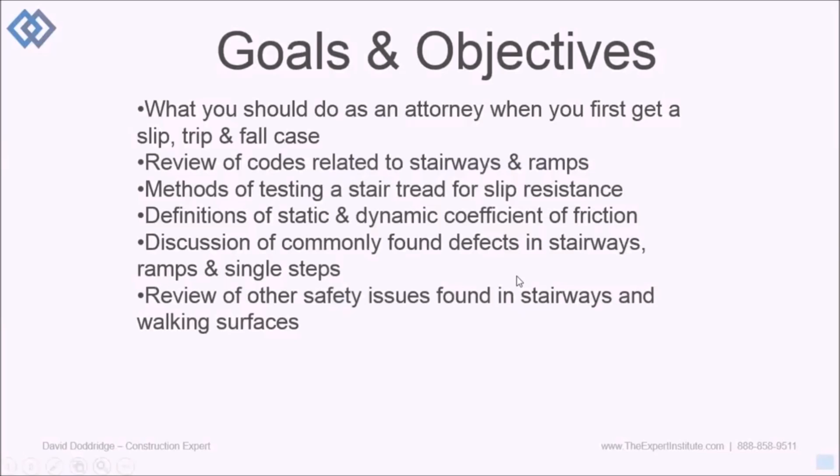So, what should you do as an attorney when you first get a slip, trip, or fall case? Again, this comes from the advice of my attorney clients.

Go to the scene, take pictures from all angles - the more the merrier, really. You want to try to memorialize the scene as accurately as you can and as soon as you can before it changes.

Sit and observe the scene yourself, maybe not 20 minutes, but just stand and watch. If it's a busy location, you'll see people, how they use it.

Maybe make a note of the weather conditions, of course, if it's an outside stairway or if it's an inside stairway in close proximity to an outside door. Maybe some contaminants, water, whatever, had migrated into the stairway area.

Obviously, ask the client if there were any witnesses. Get an immediate statement. Interview employees.

If it's in a retail location, maybe they might give you some clues as to other accidents that have occurred, and why. Check the status of the owner.

Find out who the owner or the lessee is. Find out if the owner is a corporation and who the shareholders are. Find out if the lease is recorded. Find out if the lessee is responsible for...

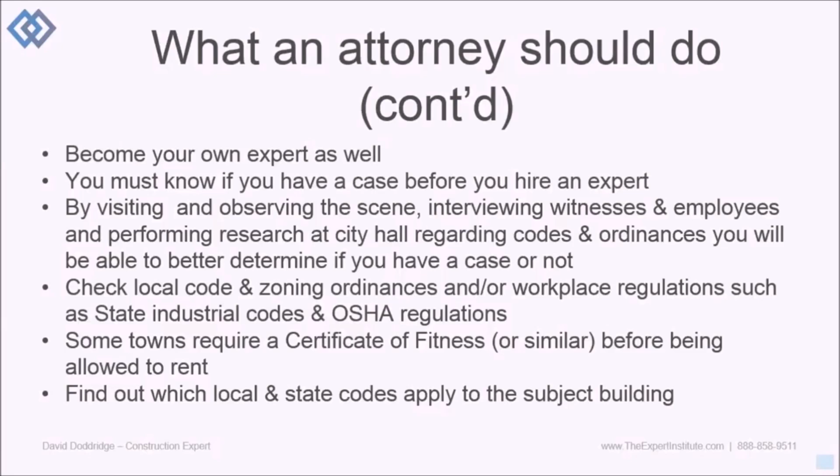...code violation. Some towns require a certificate of fitness before being allowed to rent. So there are local codes that come into play as well.

If it's a workplace accident, ask for a copy of the written safety plan, like on a construction site. The contractor and subcontractors should have safety plans, and find out if there were any safety meetings held. Again, state industrial codes and federal OSHA regulations may all apply.

Key market segments most affected by slips, trips, and falls: healthcare, the aging population, of course, food service, in the back in the kitchen. I've worked in kitchens before, and those floors can certainly get slippery, and it can be a real madhouse. Hospitality industry, lots of people coming in and out. Retail, mercantile, office, transportation, industrial, gaming, and casinos are always packed with people. Escalators, stairways, constantly being used.

So what are the causes and contributing factors of stairway accidents? Physiological factors, including balance, aging population. Again, a lot of older people fall. Hearing, vision. We'll get into the lack of a visual cue. In other words, sometimes, and we'll get into a lot of photographs in this presentation as well, which to me are probably the most valuable part of this presentation. Lack of a visual cue indicating that there is a step or a change in elevation, or at the top of a stairway. It's sometimes difficult to tell that a stairway even exists.

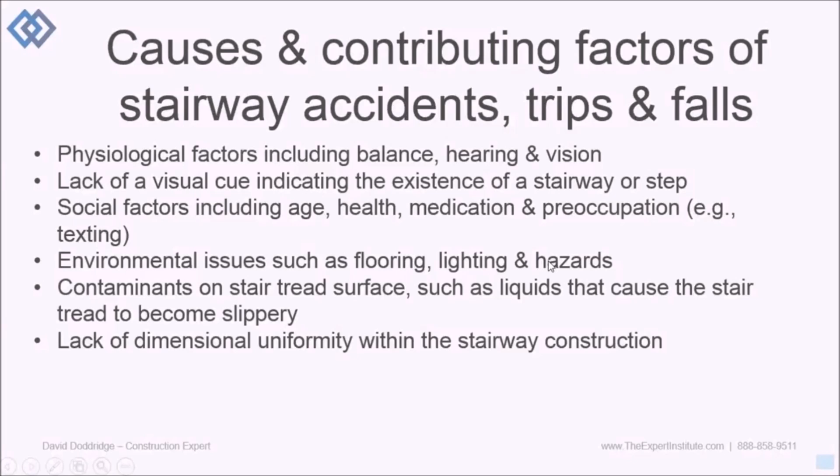Environmental issues such as flooring, lighting, hazards, things that are in the way, a handrail that's sticking out, all sorts of different things that could affect the safety of the stairway. Contaminants on the stair tread surface, such as somebody might have spilled some coffee or some water, or snow or ice or rainwater migrated in just by foot traffic. Lack of dimensional uniformity, and this is kind of a big one with me, and we're going to get into that in some of the pictorials that I will show.

So let's move on. Stairway basics, definitions of various components of a stairway. The tread is also known as the step, the surface that is actually stepped upon. The rise is the vertical distance from one tread to the next. The nosing is, if you look at a stairway perhaps in your home, the tread will stick out slightly beyond the riser, supplying what's called a toe space. Dimensional uniformity. Codes require that there are maximum variations in tread depth and riser height from one to the next in order to maintain dimensional uniformity for human factors purposes. And again, I've got sketches that we'll go into.

Structural integrity. Obviously, a stairway has to be strong enough to support itself and the load that's imposed upon it. The stringers are the angled pieces on the left and right that oftentimes the stair treads are fastened to, so they are typically a structural component. Handrails, obviously the handrails that you grasp as you're ascending or descending the stairs. And I've got sketches of this in here as well. They're to be no greater than 2 inches in width for gripping purposes. A single handrail is typically required in 1- and 2-family structures. However, a handrail is required on both sides of the stairway for commercial buildings.

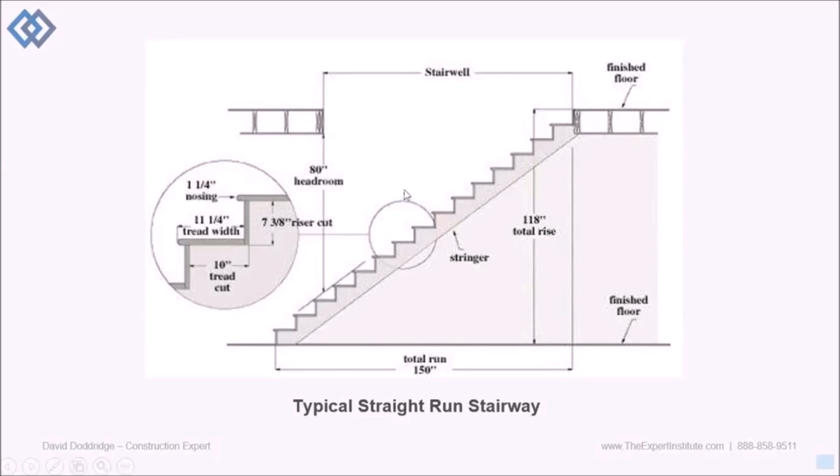This is the tread width. 11¼ is a typical dimension. Headroom, this is 80 inches, and that is measured vertically from the leading edge of the treads. That is a typical headroom for a stairway, particularly in a 1- and 2-family residence. In commercial, sometimes the code requires more. So we get into a spiral stairway. We've all seen these. I'm not a big fan of them. In my opinion, they're pretty dangerous, but they do exist. There are codes with regards to the dimensions of spiral stairways as well.

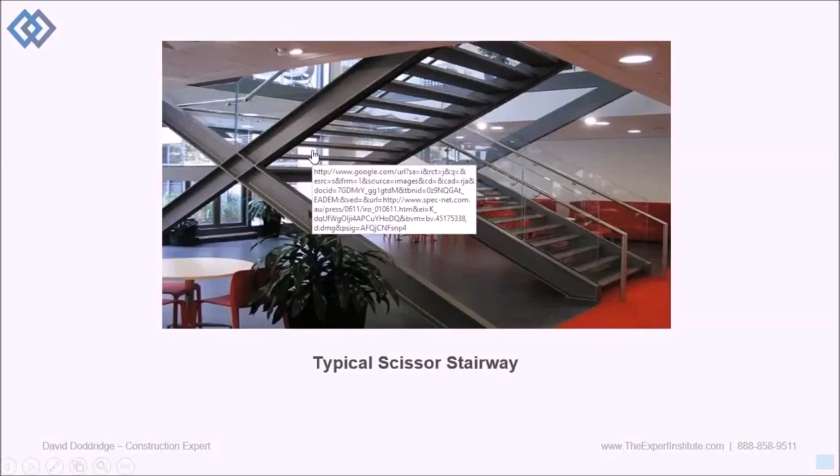This is a typical scissor stair. You can tell by looking at it why it's called a scissor stair. So here we have a good example, the handrail that comes up at a certain height, usually 34 or 32 to 38 inches, I believe, measured vertically off the leading edge of the treads. And then you come up and you get to a landing. So this over in here is going to be referred to as a guardrail. Okay, the guardrail has to meet certain guardrail requirements.

I'm not a big fan of these either. These are pretty dangerous. This is known as an alternating tread stairway, and it's a space saver. Obviously not used really in residential, but more in industrial applications. And there are some specific codes with respect to the amount of floor space that a stairway like this is allowed to serve. Naturally, this is a stairway that is not going to accommodate high foot traffic.

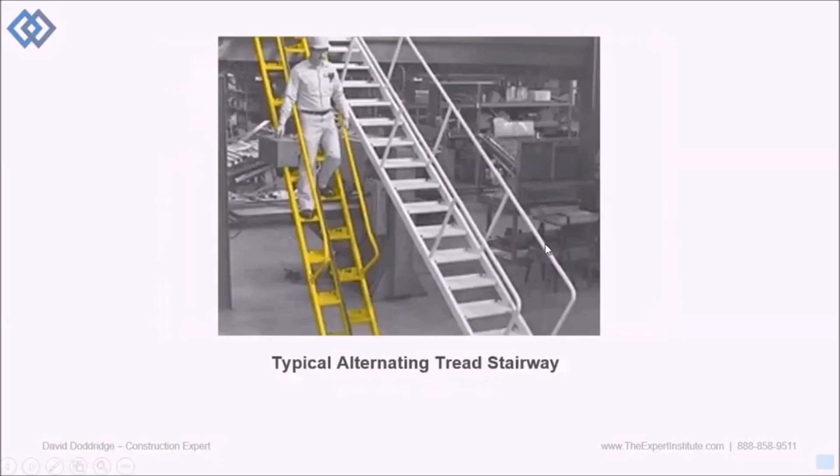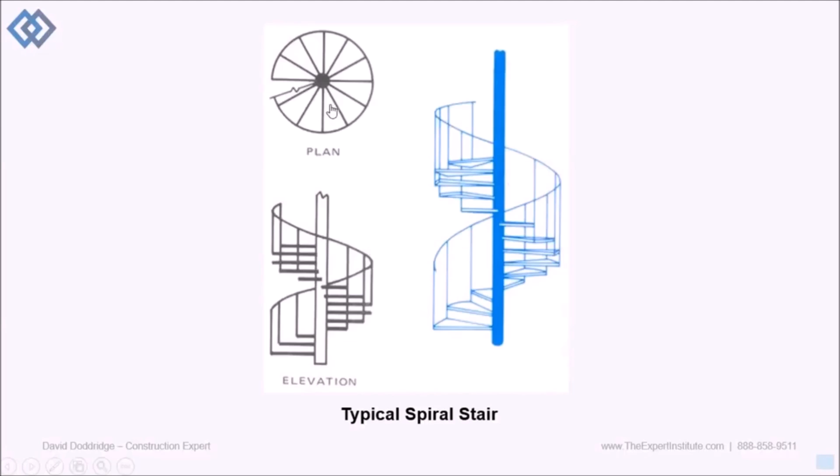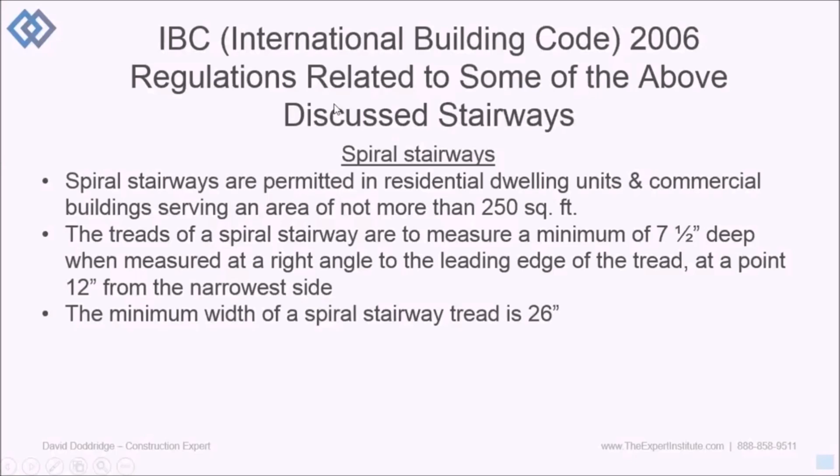So let's jump back to a spiral stairway right here. When you measure out along this radius 12 inches, the depth of the tread in this direction at a right angle to that 12-inch measurement cannot fall below, I believe, 7.5 inches. So in other words, the tread of a spiral stairway, when measured from that narrow point 12 inches out, cannot be less than 7.5 inches deep at that point. The overall minimum width of a spiral stairway tread is 26 inches. So the treads themselves cannot be less than that.

Building code continued. This first one is an OSHA regulation. OSHA Part 1926, which regulates the construction industry, does not allow, as I mentioned earlier, the use of pan stairways by workers until the pans are filled with concrete or a temporary wood filler piece. One of the reasons why I included this in this presentation is because I do a lot of construction accident work, and this happens all the time. A worker will be walking down or up a metal pan stairway that's not filled in, and their foot will catch on an edge, and they'll trip and they'll fall.

Alternating tread stairways, much like spiral stairways, are only allowed to serve a fairly small area, and they're limited to their use in factory, high hazard, and storage buildings. Again, not more than 250 square feet. So, say, a storage area or something like that. Alternating tread stairways are also allowed for use in institutional buildings, such as prisons, serving a guard tower, observation room, or control room not more than 250 square feet.

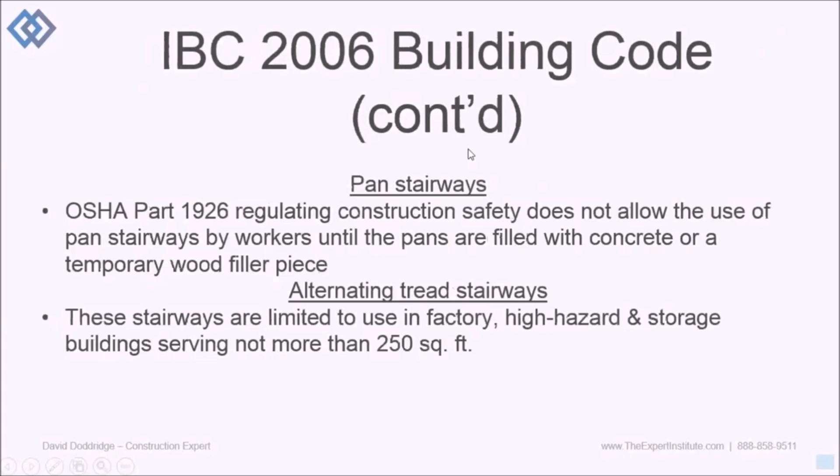So these code regulations are pretty specific with regards to dimensions, and this is not something that is necessarily going to be all that obvious by looking at it. It's not going to be obvious until you actually measure and analyze the stairway.

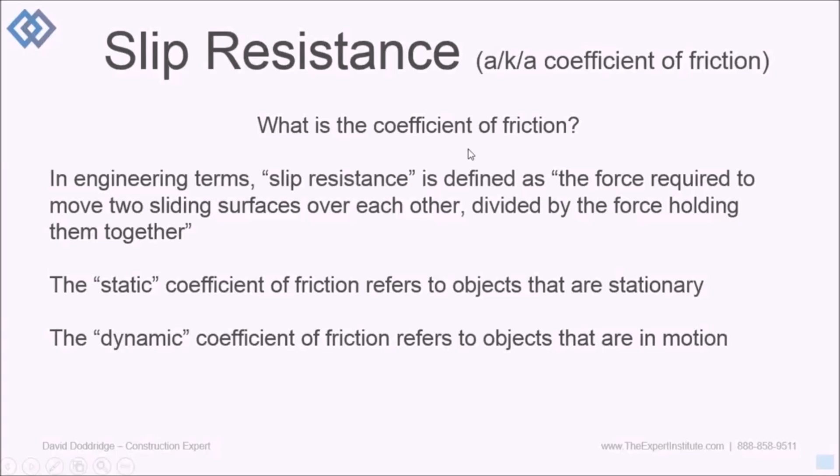Okay, so let's get into the slip resistance of a stair tread, which is also known as the coefficient of friction. So what is the coefficient of friction? In engineering terms, it's defined as the force required to move two sliding surfaces over each other divided by the force holding them together. And I'll simplify that in a minute. Static coefficient of friction means that the object is stationary. Dynamic coefficient of friction refers to objects that are in motion.

So to put it in simpler terms, for the purposes of this presentation, a coefficient is a number that is used as a constant or a multiplier. So if an object weighs 100 pounds and the static coefficient of friction is 0.50, you take 100 pounds, multiply by 0.50. It would therefore take 50 pounds of lateral force placed against the object to cause it to break free from its static position and slide along the surface that it's sitting upon. So it's really fairly simple for the purposes of this presentation.

Some building codes and the Americans with Disabilities Act accessibility guidelines recommend a coefficient of friction that is 0.50 or greater, although they are not typically enforced. And why is that? Because determining the coefficient of friction of a walking surface, or the surface of a ramp or a stairway after it's been built, requires testing, and it's just not practical for a building inspector to test the coefficient of friction of a floor surface. So it's not actually enforced with regards to testing. Therefore, most building codes simply state that non-skid or slip-resistant materials are to be used.

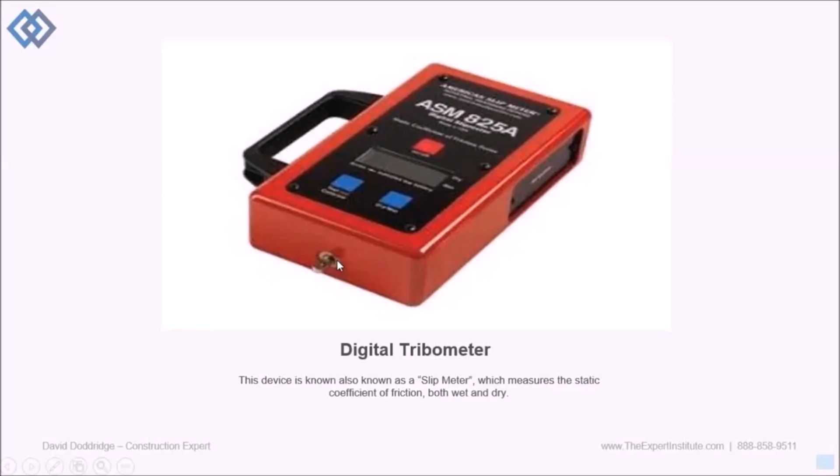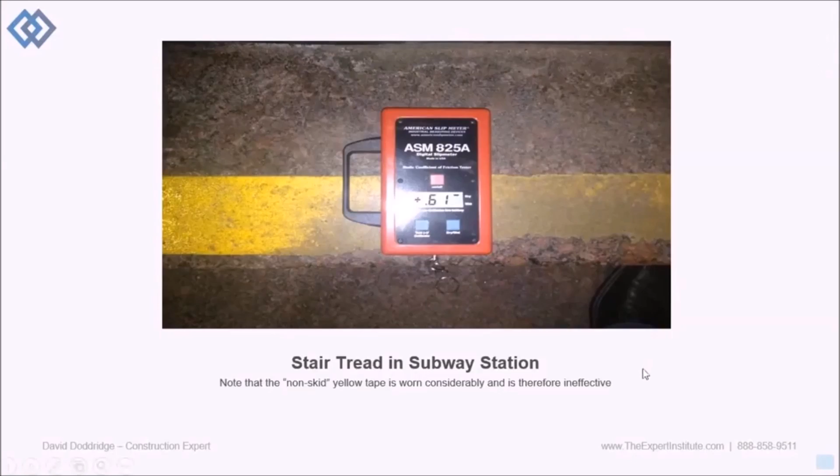Okay, so codes and standards. Various local, state, and federal governments require stairs and ramps to meet certain requirements. For example, the International Code Council, which I was discussing earlier, authors and publishes model codes that are then adopted by states. Most states in the country now are adopting ICC codes, and there's a variety of them. There's the IBC, the International Building Code, the IRC, the International Residential Code, and the IPMC, the International Property Maintenance Code, which deals with the maintenance, including the safety, of existing buildings.

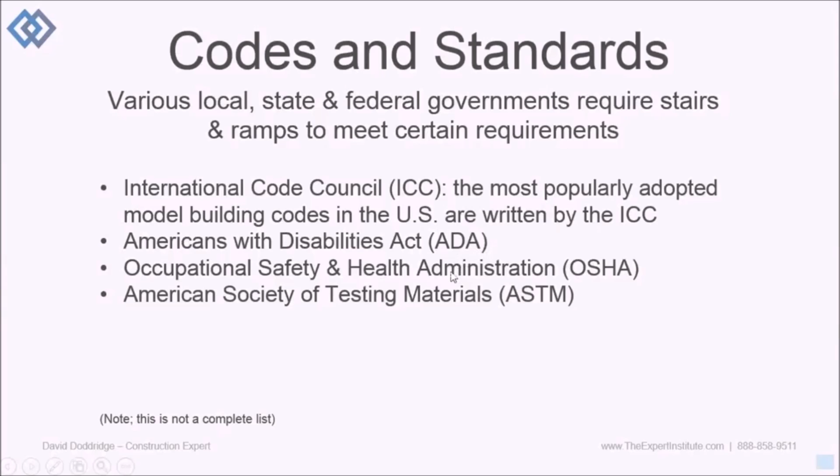And then of course there's the Americans with Disabilities Act. The accessibility guidelines are what regulate ramps, communication devices, elevators, that kind of thing. OSHA, of course, the Occupational Safety and Health Administration. The American Society for Testing and Materials, the ASTM, publishes what are called industry standards. There's an industry standard they publish that I use quite often, and I will go into that shortly. And obviously this is not a complete list.

Building codes are typically grandfathered. The reason I'm bringing this up is because if a building were built 80 years ago and the code in place at that time required certain things of a stairway with regards to dimensions, handrails, and any number of different things, as long as it met the code in place at that time, and there has not been a change of use within the building, then the stairway remains code compliant.

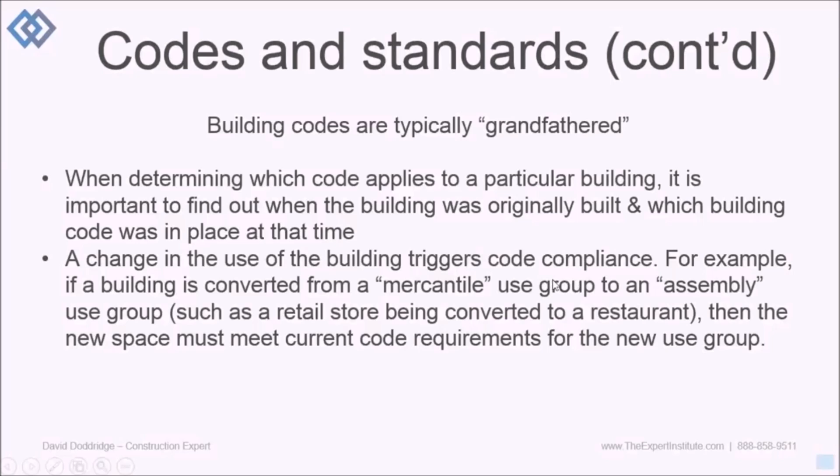You can't expect building owners to upgrade their stairways as codes change. What triggers code compliance is the change of use. For example, if the building is converted from a mercantile use group to an assembly use group, such as a retail store being converted into a restaurant, then that change of use will trigger code compliance.

There are variances that can be granted if there's space restrictions or lot line restrictions. It can get fairly complicated, but that's typically what will trigger code compliance, the change of use of a building or a space.

The International Code Council, as I discussed earlier, used to be known as BOCA, which stands for Building Officials and Code Administrators. BOCA joined forces with a couple of other code authoring agencies and formed the International Code Council.

As I discussed earlier, ICC codes are adopted as building codes by most states. So as a result, building codes are becoming very universalized, pretty much the same from one state to the next. The only difference, especially with respect to things like stairways, is that, for example, Rhode Island will have...

adopted the International Building Code 2006 with Rhode Island amendments. Those amendments are specific to Rhode Island, and they might have to do with wind loads or other things specific to Rhode Island. But with respect to something like a stairway, those are quite universalized from one state to the next.

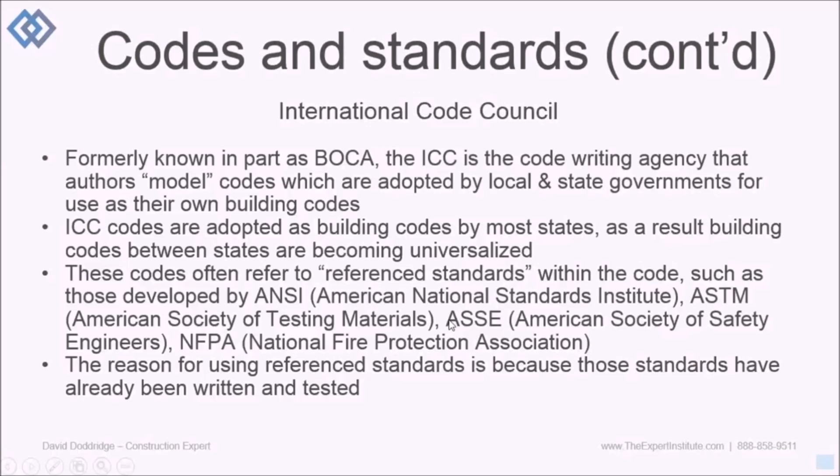Within these codes are what are called referenced standards, such as those developed by ANSI, the American National Standards Institute, and ASTM, which I discussed earlier. The reason these referenced standards are used within the codes is because those standards have already been written and tested. So for example, they'll say that fire sprinklers are to meet NFPA such and such, and that's it. They don't have to reinvent the wheel. They simply use these standards as referenced standards within the code.

Here are some examples of stairway and ramp requirements found within the International Building Code. For example, ramps are supposed to have a slope of not more than 1 inch vertical for each 12 inches horizontal. So if you measure 12 inches horizontally, the rise cannot be more than 1 inch.

Stairways in commercial buildings, meaning riser and tread type stairways, not ramps, are to have a maximum rise of 7 inches and a minimum rise of 4 inches. You would think that the less the rise, the less the tripping hazard, but that's not necessarily true. If it's less than 4 inches, you often can't even see it or tell that it's there. So there is a minimum rise requirement as well.

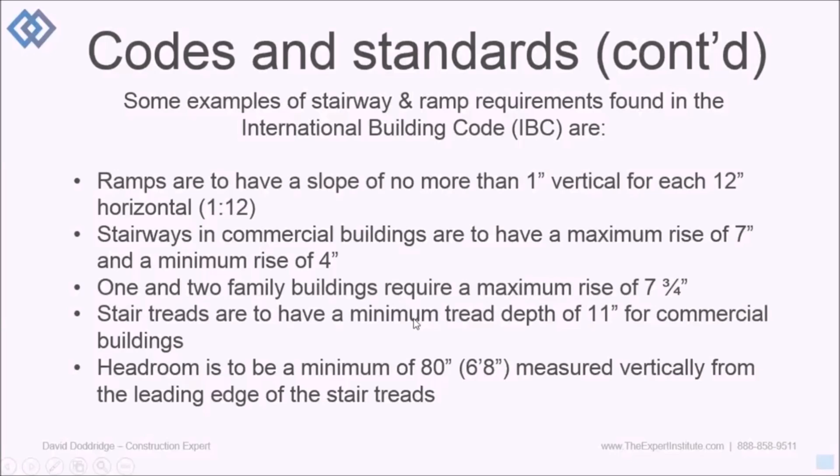One and two family buildings require a maximum rise of 7 and 3/4 inches. Not long ago, that was actually 8 and 1/4 inches. So again, as building codes change, you can't expect existing stairways to change.

Stair treads require a minimum tread depth of 11 inches for commercial buildings, as I illustrated in that cross-sectional diagram earlier, and I think that one was 11 and 1/4 inches. The headroom, again as shown in that diagram, is a minimum requirement of 80 inches.

Stairways must be a minimum of 44 inches wide in commercial buildings, unless the occupant load is less than 50, in which case the minimum stairway width is 36 inches. 50 is a pretty small number, so typically in a decent-sized commercial building, you're going to find stairways wider than 36 inches, 44 minimum.

Here we get into codes with respect to dimensional uniformity, and I run into this a lot. I've got some pretty good pictures I can use as examples, but in other words, the height of one rise cannot vary more than 3/8 of an inch from the one adjacent to it. It sounds like a small number, but it actually isn't.

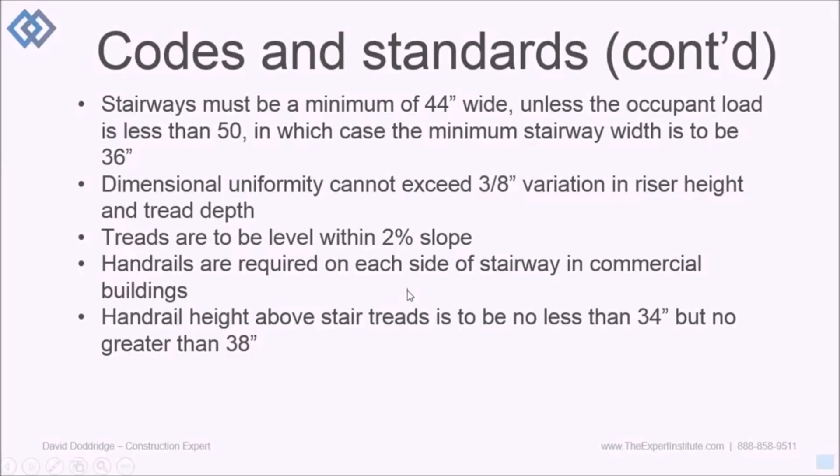Treads are to be level within a 2% slope. Naturally, if you're walking up the stairway, you want the stair treads, the surface that you're stepping upon, to be level. But it's a fairly small surface, only 11 inches wide, so it can have a little bit of a slope, but not more than 2%.

Handrails are required on each side of a stairway in a commercial building. Handrail height above the stair treads should be no less than 34 inches, but no greater than 38 inches. That has actually changed a little bit recently too.

The strength of the handrails and guardrails is to be designed to resist a concentrated load of at least 200 pounds, obviously to prevent somebody from falling through it.

There are also codes regulating the width of a handrail, or what I call the graspability of a handrail, and I've got some good sketches with respect to that coming up.

Codes for stairways in historic buildings are sometimes grandfathered and therefore excluded from compliance with current codes, and that's sort of an unusual point. I put that in because I was at a building, I think a law firm in Connecticut, and the office was in an old historic building. The stairway and handrails were original to the building, which I believe was originally built as a residential, then converted to office space. Because of its historic nature and the location of the stairway within the building, they got a variance to exclude that stairway from being compliant with current code.

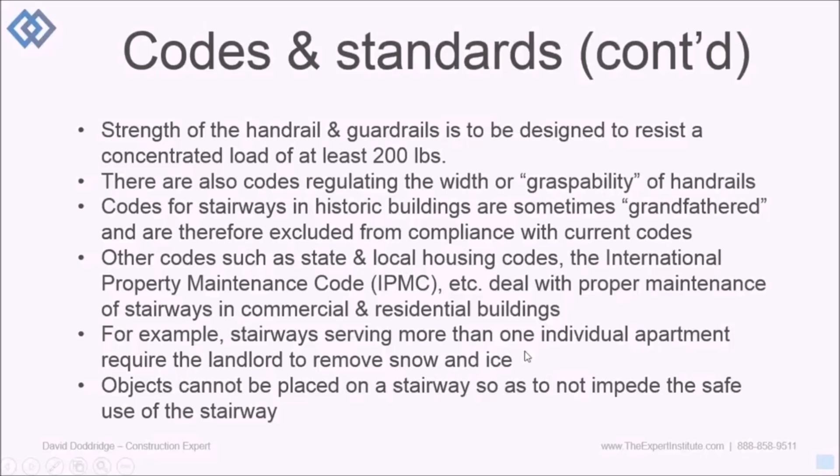So, for example, in Massachusetts, and I'm sure other states as well, if you have an apartment building, let's say a 4-family apartment building, and there's a stairway that only serves one apartment, then the tenant, as long as it's in the lease agreement, is responsible for snow and ice removal. If that stairway serves more than one apartment, let's say it's an outside stairway, then it is the landlord who is responsible for making sure the snow and ice is removed.

Objects cannot be placed on a stairway so as to impede its safe use, so you can't have boxes, toys, or whatever on a stairway.

Here's a sketch of a landing. This is a landing on a typical scissor stairway, as I showed in the photograph earlier. So as you come up the stairs, go across the landing, and then go up the stairs in this direction.

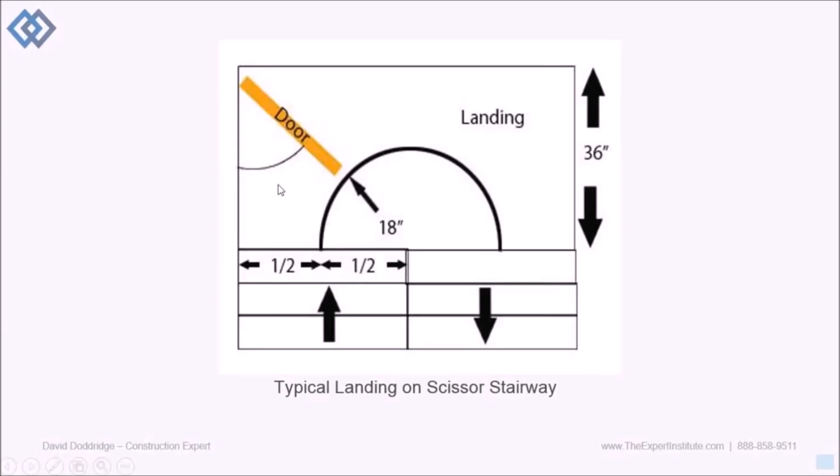So there are codes with respect to how much a door located within that landing can swing into the landing, how much space it's allowed to take away from the landing when it's in use. Again, right here, this is from an ICC code.

This deals with landing width. Landing width, in other words, this direction here, left to right, cannot be less than that of the stairway or door, whichever is greater. So if this stairway in this direction, left to right, is 44 inches, then the landing has to be 44 inches.

When the door is in the open position, it should not reduce the required width or depth of a landing by more than 7 inches. So this little space here cannot be more than 7 inches. Therefore, the door in the planning of a building has to be located in the right spot so as to make sure the stairway and landing is code compliant.

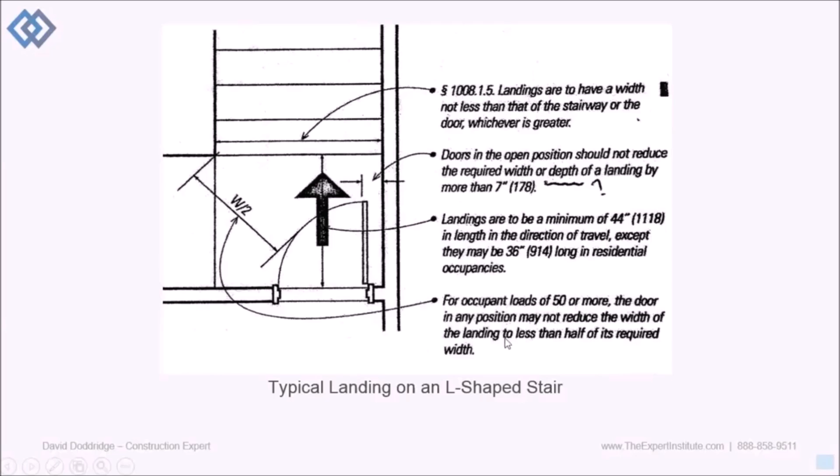Landings minimum of 44 inches in length in the direction of travel, front to back, except they may be 36 inches in residential occupancies. And once again, for occupant loads of 50 or more, the door in any position may not reduce the width of the landing to less than half of its required width. So that's what this dimension here is. When the door is in use, it cannot reduce the width of the landing by more than half. So those are codes related to landings.

Okay, so here we get into handrails. This is important, and I know it seems like a lot just for a handrail, but the minimum diameter is 1 1/4 inches, maximum diameter of 2 inches. That's for a round handrail like this one here. Other shapes of equivalent graspability are acceptable. Railings that do not have a circular profile shall have a perimeter dimension of at least 4 inches but no greater than 6 1/4 inches, and a maximum cross-section dimension of 2 1/4 inches.

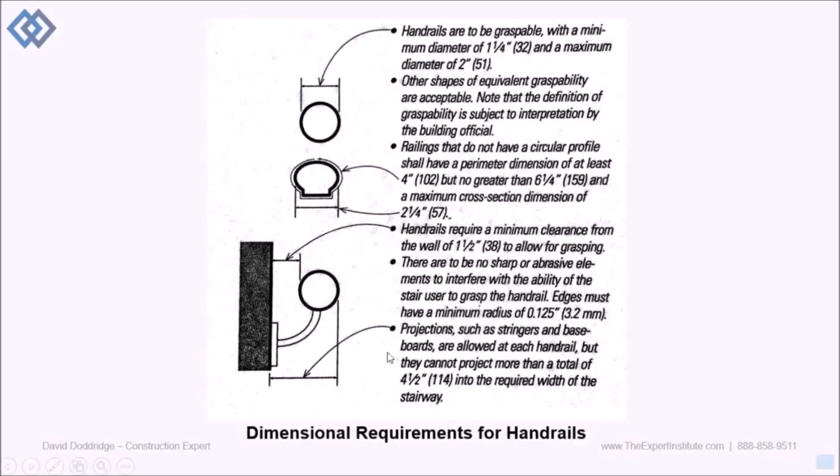The handrail needs space so that your fingers can fit and you can fully grasp the handrail, so there's a code for that: 1 1/2 inches minimum off the wall. And then, of course, the amount of space that the handrail itself can take from the width of the stairway—it cannot project into the stairway by more than 4 1/2 inches. So there are some very specific codes related to all these dimensions.

And again, when you stand and look at a stairway, it might look safe, but once you start to take various dimensions, you might find all sorts of code violations that could render it unsafe and not in compliance with code. The location of handrails, the number of handrails that are required.

Only those portions of a stairway width within 30 inches of this handrail may count toward the width required for egress capacity. The egress capacity is based on the occupancy load, okay?

So let's say that this stairway is 60 inches in width, and the occupancy load requires that dimension of the stairway. That means that the portion of the stairway that is within 30 inches of this handrail is the only portion of the stairway that will count toward the required width. If this stairway were 8 feet across, because the occupancy load dictated that they needed a stairway that wide, then you'll find a handrail going in the middle, because again, only that which is within 30 inches of the handrail counts toward the width of the stairway with respect to the occupancy load.

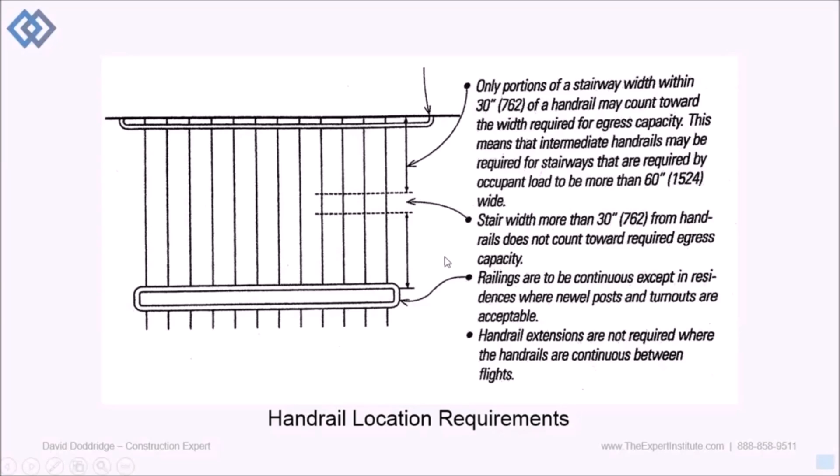Handrails are to be continuous, so they cannot be interrupted, and I actually have a couple of good photographs, I think, with respect to that.

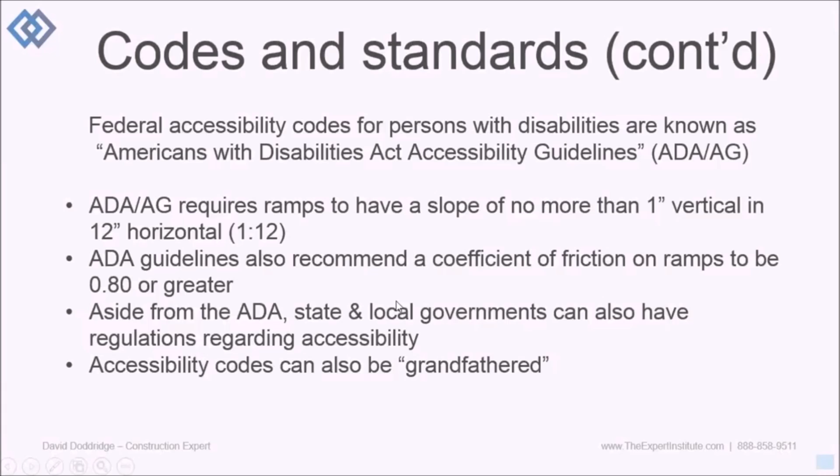So more on codes and standards. The ADA-AG requires ramps to have a slope no more than 1 inch vertical and 12-inch horizontal, which matches the ICC code regulations. ADA guidelines recommend a coefficient of friction on ramps to be 0.80 or greater, which is pretty skid resistant. But again, there's that word 'recommend,' so it's not a regulation because it's not tested.

And therefore really not enforced. Aside from the ADA, there are state and local government regulations that can also have regulations regarding accessibility. So there's federal codes, there's state codes, and there's local codes. Accessibility codes can also be grandfathered in sometimes.

Occupational Safety and Health Administration relative to stairways: construction safety OSHA regulations for construction safety require stairways 30 inches or higher to have at least one handrail.

Temporary stairways for construction sites are required to be between a 30 and 50-degree angle from horizontal, and that's pretty generous. But again, it's a temporary stairway, not a permanent stairway. But it's interesting—riser height and tread depth are not to vary more than 1/4 of an inch throughout the stairway. So here you have this temporary stairway on a construction site that's going to get torn apart, but it still has to be built fairly accurately. As a matter of fact, that 1/4 inch is less than the 3/8 inch regulation in the International Code Council building codes.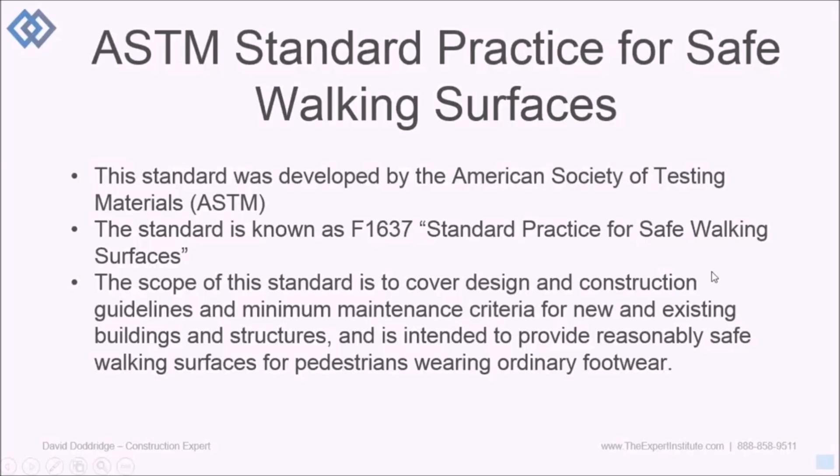It's a pretty well-written, comprehensive standard. The scope of the standard covers design and construction guidelines and minimum maintenance criteria for new and existing buildings and structures. It's intended to provide reasonably safe walking surfaces for pedestrians wearing ordinary footwear — that's a quote directly from the standard.

This is a standard that I use fairly often, and it's one of the few that references a visual cue, or the demarcation of the leading edge of a step or a platform where there's a change in elevation. I've got some photographs coming up where I can show some pretty good examples of that.

That ASTM standard F1637 addresses flooring and walkways, and is intended to address all these different things: carpeting, changes in level, mats and runners, lighting, headroom, exterior walkways, hardware, stairs and single steps — which a lot of codes and standards do not address.

I'm referring to single steps, speed bumps, wheel stops, gratings, and warnings. So it's a pretty comprehensive standard.

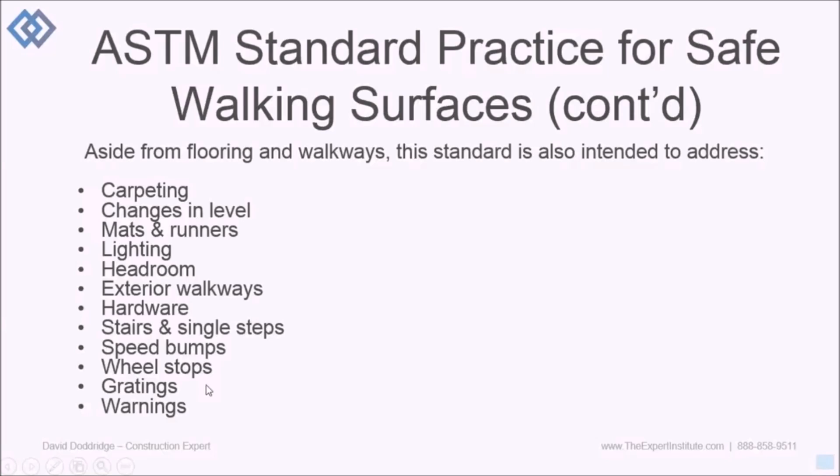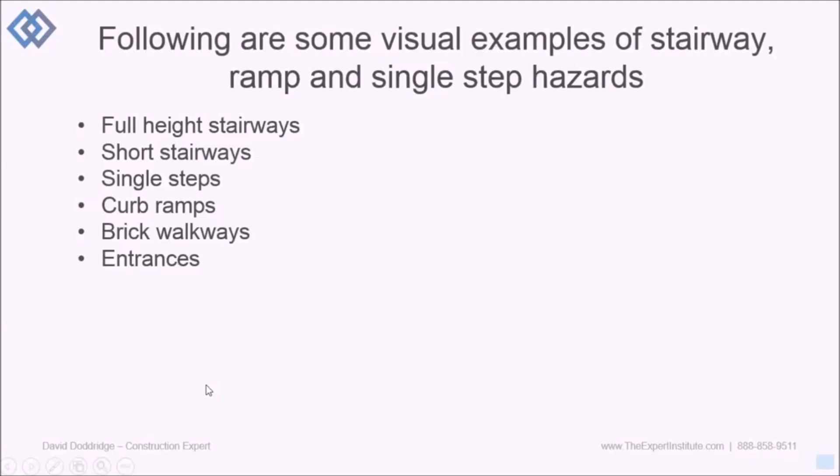So following are some visual examples of stairway, ramp, and single-step hazards. We're going to take a look at some full-height stairways, shorter stairways, single-steps, curb ramps, brick walkways, and entrances.

These are actual cases that I did. You might look at this as a layperson and say, okay, it looks like a reasonably safe stairway. And while its structural integrity may be intact, there are a lot of things wrong with this stairway.

The first thing that should jump out at you is the amount of the rise of this lower step is much less than all of the other rises contained within the stairway. So as you're walking down the stairs, you're used to, say, 7.5 inches, 7.5 inches, 7 3/8 inches.

As you descend the stairway, all of a sudden it's 5 inches. So your foot hits the ground much sooner than expected. Add a little bit of ice to the bottom of this stairway, and it can make for a very hazardous situation. Actually, one of my clients hired me to evaluate the stairway because that's exactly what happened.

But there are other things as well. There's no handrail here, and I'm not sure if this is — I think it might be a two-family. There should be a guardrail in here, because as you ascend the stairway, you're getting 3, 4, 5 feet up off the ground. And while an adult may not fall there, a child certainly could.

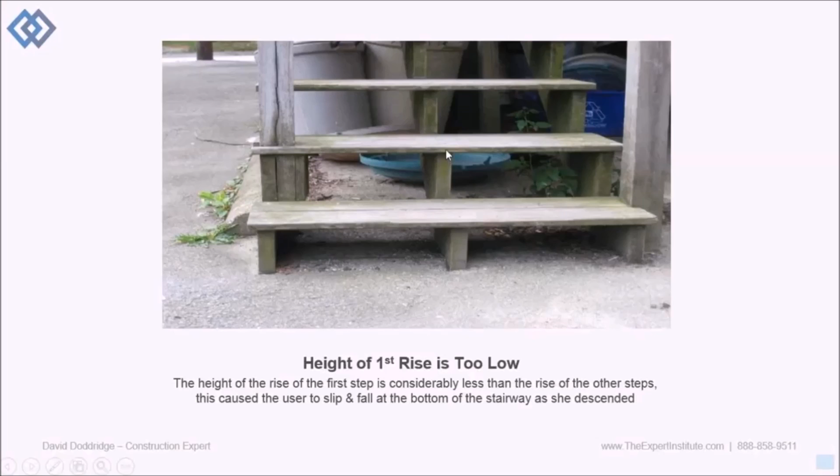This handrail is made out of a 2x4, which is 3.5 inches in width — considerably wider than that allowed by code. Again, the height of this first rise is much less than the height of these other rises. So it really throws the user of the stairway off as you're descending.

This is one of my favorite stairways, but not really. There's everything wrong with this stairway. It's in an industrial location.

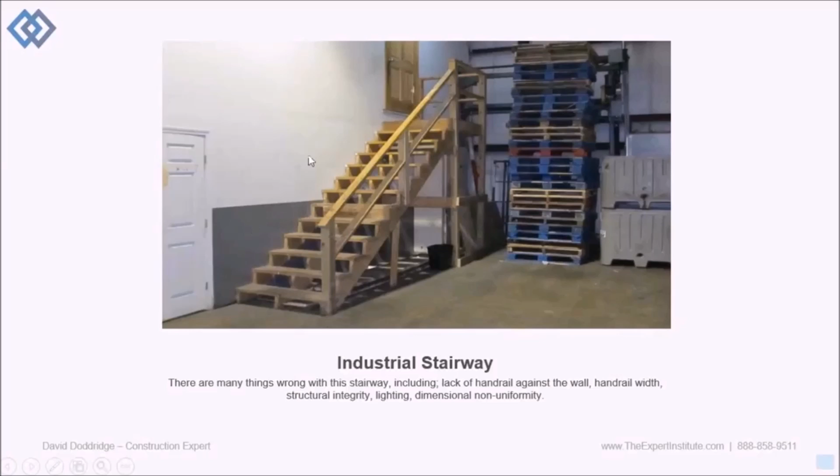While the lighting was poor, take a close look — what do you see? You see no handrail up against this wall, right? You see a handrail on this side that is a 2x4, 3.5 inches in width, which is much wider than that allowed by code.

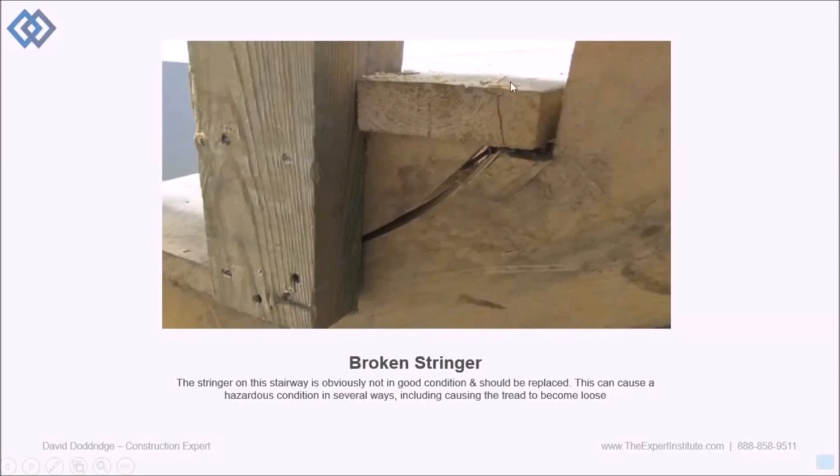But as you get into it, there's a lack of structural integrity right there if I've ever seen it. The nail from this stair tread going down into this stringer probably split as soon as they put it in, and they just didn't do anything about it.

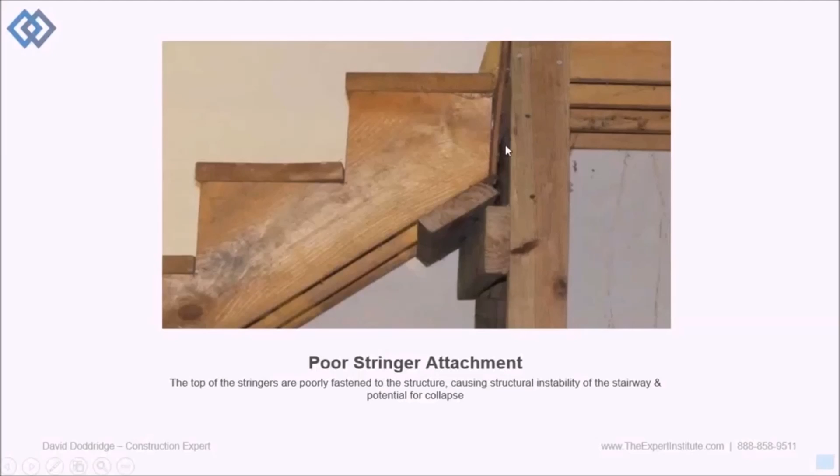Right here, where it's fastened to the top, it's pulling away from the frame. So that obviously is not structurally sound.

This isn't a great photograph, I apologize for that. But the vertical rise of this top rise was, when I measured it, considerably higher than the rest. So there's dimensional non-uniformity throughout this stairway, as well as all these other hazards.

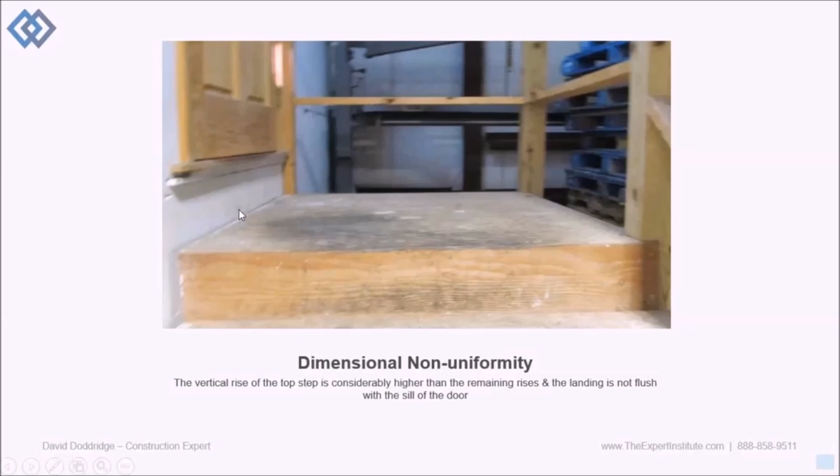Here we have a tread, and then we have this single board that is placed on this step that exists nowhere else in the stairway. I'm not sure why they even put that on there, but when I was talking about nosing earlier, the nosing is to project beyond the rise by 1 1/4 inches.

Well, this is just the opposite. The nosing stands behind this rise. So this is just a very, very poorly constructed stairway, and just an accident waiting to happen, which is exactly what did happen.

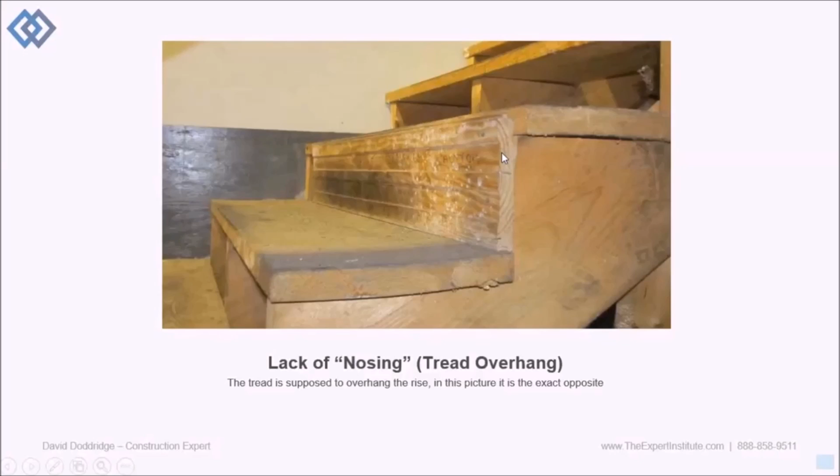Here we have, looks can be pretty deceiving. This is in a residential condo that was being rented. This newel post right here, it took very little force when you grabbed it to move this thing a lot in both directions. I mean, this thing was really, really weak and very wobbly. And that is because of the way it was constructed.

I unfortunately don't have a picture of that in this presentation, but if you bear with me here, the bottom of this newel post - when you construct a railing, the newel post has to be fastened to the frame of the building in order to provide strength. Well, all the carpenter did was just cut it off and toenail it to this piece of oak flooring here. So as this piece of oak flooring loosened, so did the handrail. It's just a very poor job of constructing the stairway here, or the guardrail.

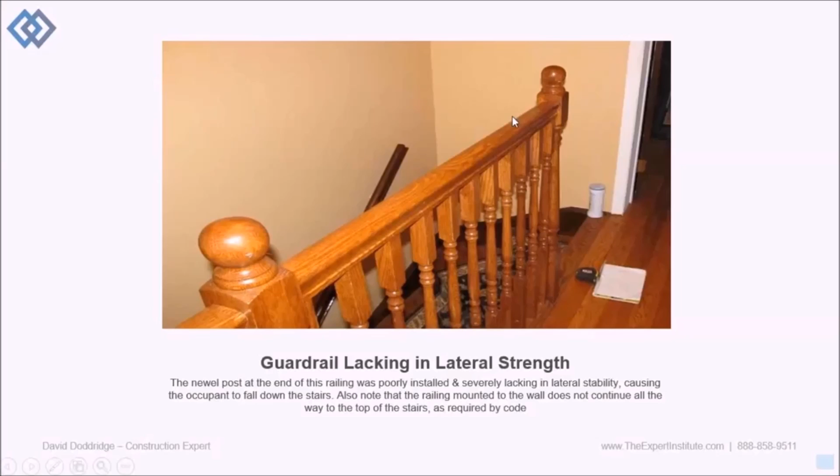This handrail here against the wall is supposed to be continuous. It's supposed to go up, over, and up, and be continuous from top to bottom. So when she came around, grabbed the newel post, and it was extremely loose, and she fell down the stairs, she had nothing to grab onto. So again, looks can be deceiving.

As with this one here as well. This is an ATM kiosk owned by a major bank. This walking surface on the outside is not flush with this walking surface on the inside. So there's an immediate step at this door. And that's a no-no, that is a code violation.

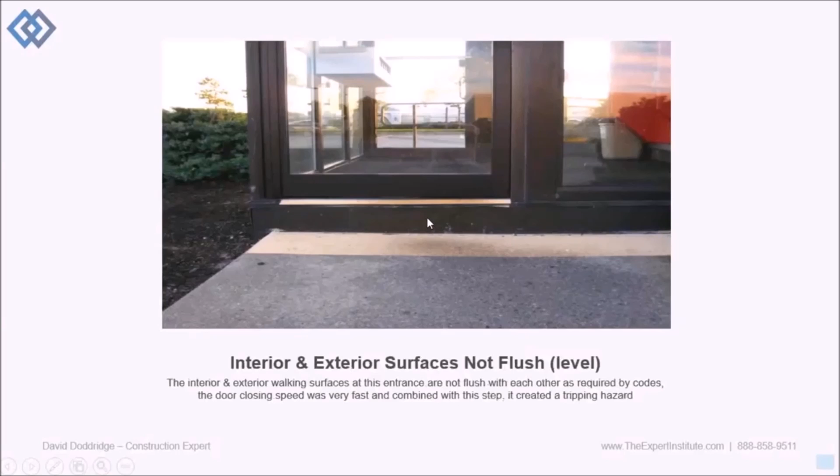So basically what happened was a woman opened this door and went to enter the kiosk, and the door closing speed was pretty high. And so the door sort of came slamming shut behind her, essentially sort of pushing her into the building. And there we have another code violation right here, and this is what's known as an object in the path of travel.

This is a very small little ATM kiosk, right? It's not big at all. But here's this shelf that's right inside the doorway. So she came falling in this doorway and fractured her larynx right on this corner here. She literally landed with her throat right on this corner.

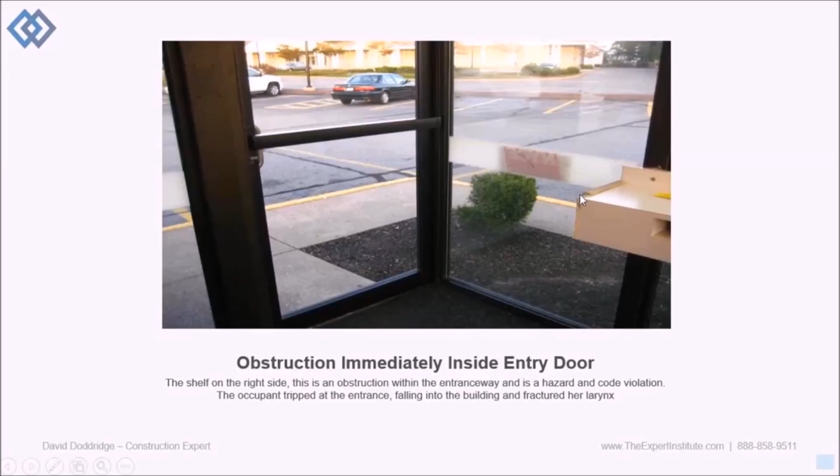And of course, I've been back to the same ATM kiosk years later to use it, and I took a look at everything, and nothing has changed. The door closing speed has not been adjusted. Nothing has been changed on this, interestingly.

This is in Manhattan. There's a ramp right here that leads to a building. And this step right here, this little step right here - it's not really a step, but this little ledge right here was 1.5 inches high. And again, that brings us back to the 4-inch minimum requirements. Not that you would put a 4-inch step here, but the point is that it's so small you can't see it.

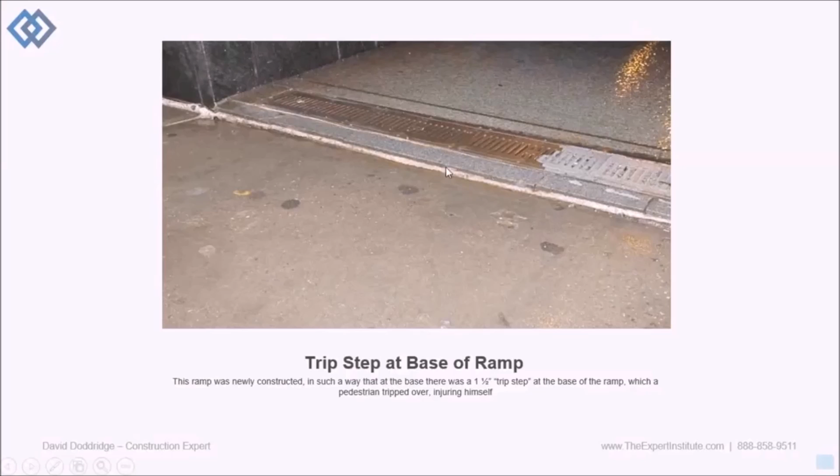So a gentleman was coming up and he tripped on this and fell, and I think fractured his wrist or an ankle or something like that. It really would not have taken anything other than a little attention to detail for whomever it was that installed this ramp to make sure that it was flush. This should be flush to within, say, like 1/4 of an inch. And I know these dimensions that I'm discussing sound relatively small, but not necessarily - a little can go a long way with regards to this kind of thing.

All right, in this case, looks cannot be deceiving because this is one of the worst stairways I've seen. Everything is wrong with this thing. No landing, it's very steep, the rise from one riser to the next is way too high. The width of the treads is too low. The handrail is too wide, and there was no lighting. I mean, it went on and on and on.

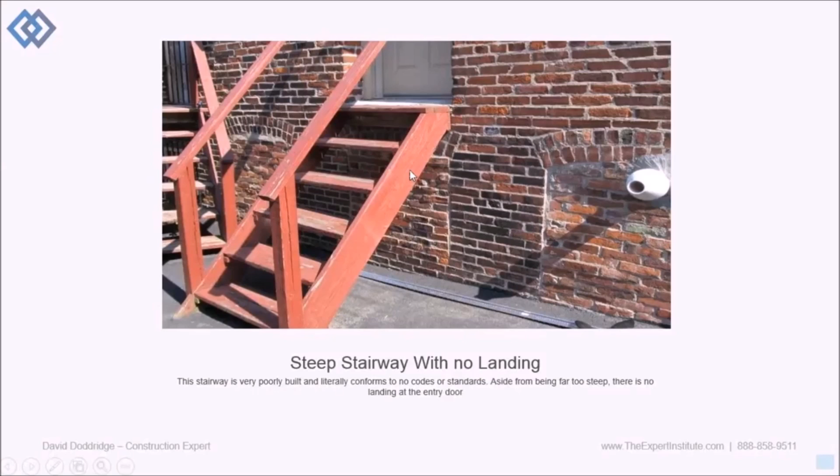And the back of this building actually contained a bunch of these same stairways. So, you know, just laziness or budgetary issues, didn't want to spend the money to do it properly.

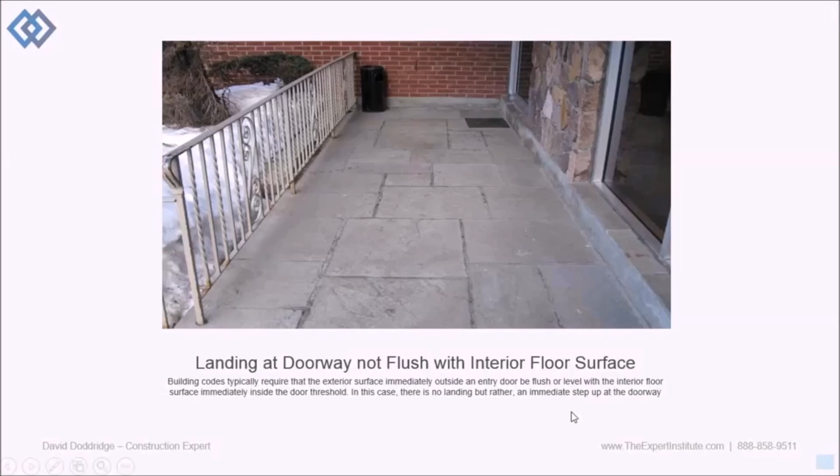and as she was being helped through the doorway, her foot caught on, I believe, the metal threshold of the door, and her knee actually went back in the opposite direction that it's supposed to be in. So I know some of these cases that I'm discussing are pretty serious injuries, and this is the day that she got out of the hospital, and this happened. So building owners really need to be aware of these kinds of things.

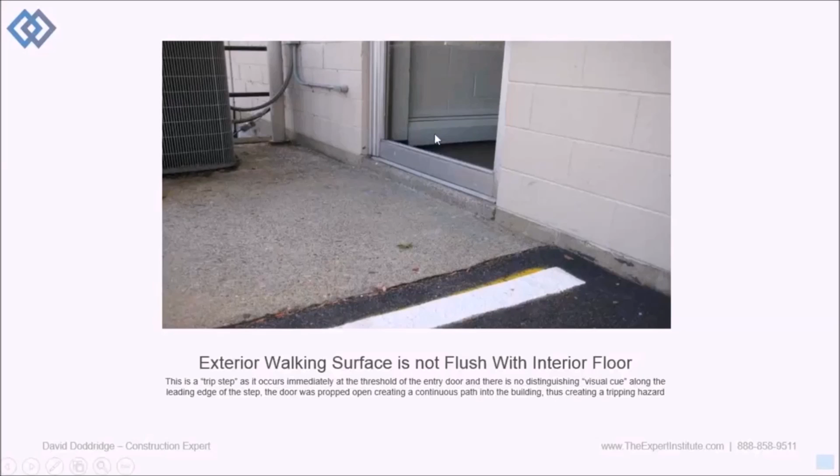This is a pretty good example of a couple of different things. This door was propped open because it was a warm summer day, and so therefore it was sort of like a continuous path of travel leading directly into the building, and we have this little less than 4-inch trip step here as a result, and it's made of the same materials as the walking surface is made of. So you really can't even see that it's there. And a gentleman came along, and with the door being open, he really didn't even slow down, and he just fell right into the building.

So it may not look like much, but these things do happen, especially with people who might be physically impaired, maybe older, maybe visually impaired a little bit. Not everybody is athletic and able to recover from these things.

Just wondering how much time I have left here. It's already 3 o'clock, sorry. I know we got a little bit of a late start, just about done.

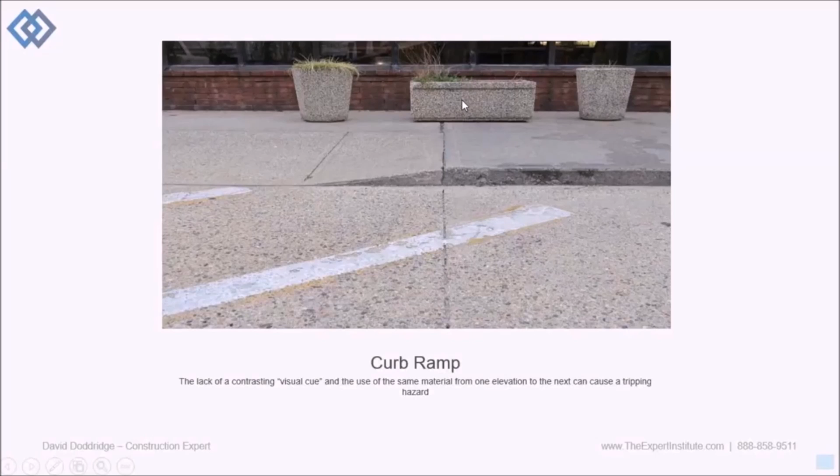Here we have a very similar circumstance. Outside landing is not flush with the inside, and somebody fell into the building. This is a curb ramp, a good example of the lack of a visual cue along this leading edge here. You really can't tell under certain lighting conditions that this little curb is here. And a woman came walking along, she didn't see it, tripped and slammed her head on this concrete planter.

So I'm going to show you now something with proper visual cue. You know, if you can't see that there's a change in elevation here, then they did a good job making sure that there's plenty of visual cues here to warn people of the existence of a change in elevation. Okay.

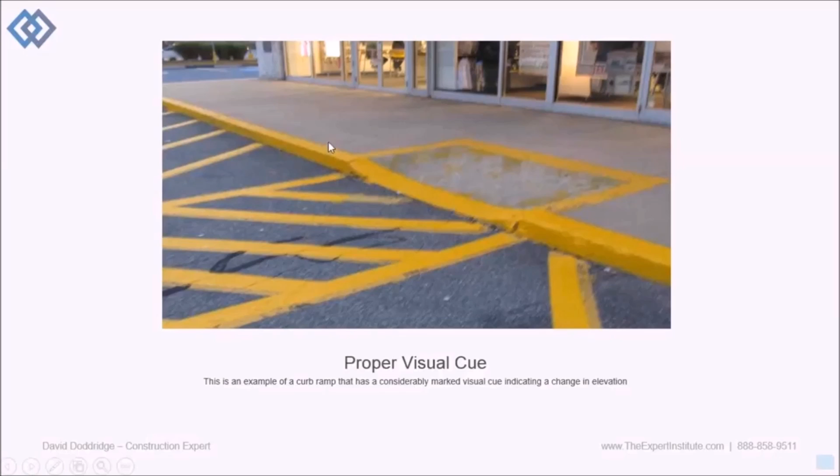We're almost done. This is just poor choice of materials. This is in a restaurant. Brick walkway, cobblestone edging, uneven surfaces. A gentleman was coming in and the tip of his cane got caught, and he fell and broke his hip.

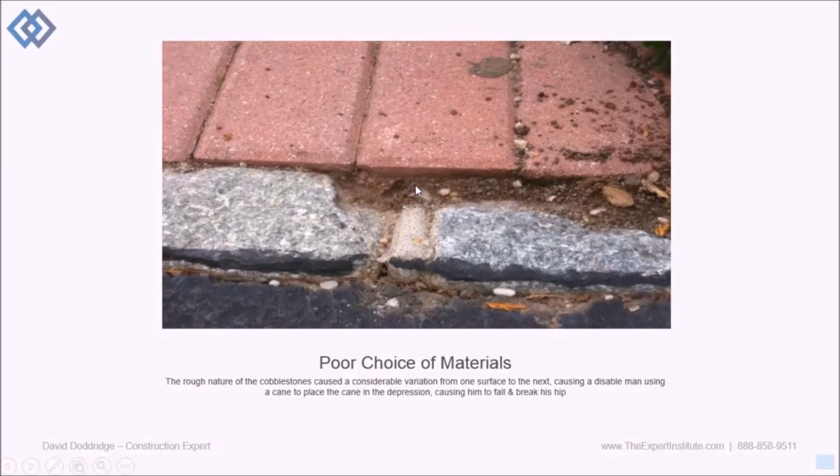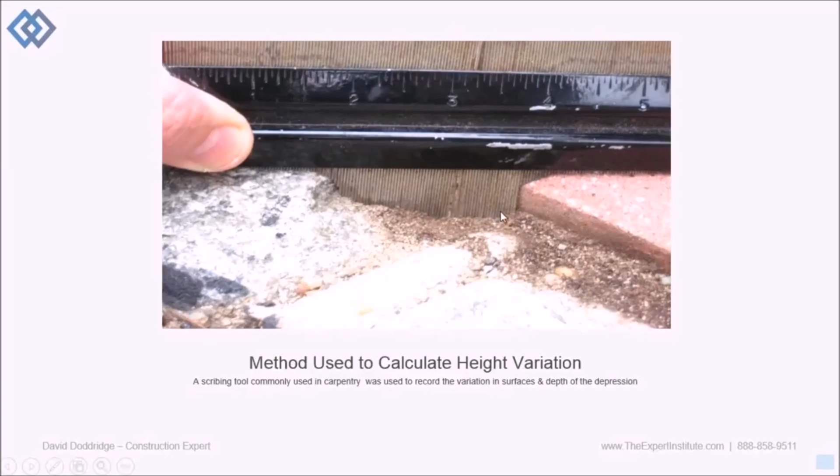And this is a tool that I used in this particular case to measure the depth of that depression. It's very difficult to do with like a tape measure. So this is a scribing tool that is used in carpentry, and you press it down against the work, and it takes the shape of whatever it is that you're pressing it against. And that's how I determined what the depth of that was.

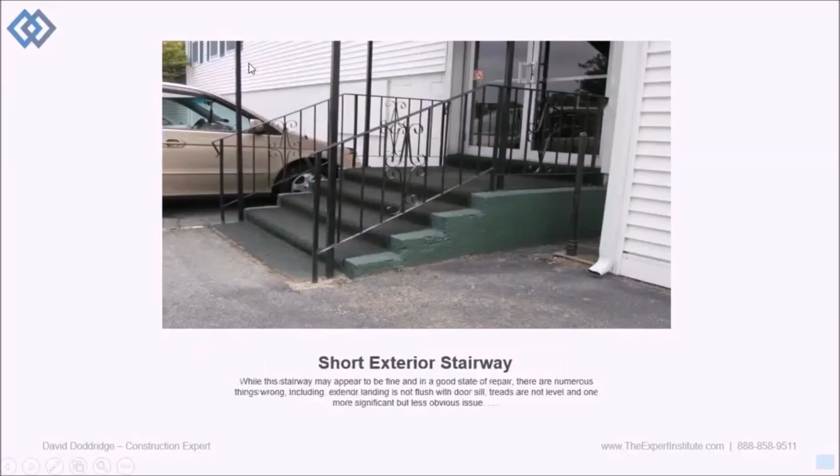So again, short stairway. I'm going to wrap this up because we're running out of time. But these posts here, these vertical posts that hold up the canopy above, impede the handrail. So this handrail is supposed to be unobstructed, and there's 4 posts that are literally welded to that handrail.

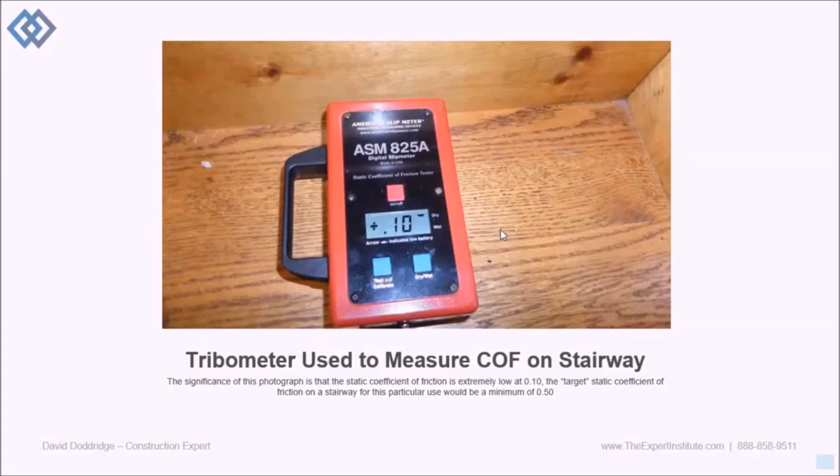So this is interesting only in that this is a wood stairway, right? And look at the coefficient of friction, 0.10 dry, okay, which is extraordinarily low and therefore very slippery. So it might look okay, but it's not. So, all right, that is the end, and I hope you all enjoyed this.

Now let's move on to the Q&A here. One question regarding an apparently unsafe stairway to the second level of a building with apartments on the second level. When one goes up the stairs, one must step down a step or two to open the door at the top of the landing in order to enter the second floor.

I'm not sure if I completely understand. I'm trying to visualize that in my head, but that certainly should not be the case. There should be a landing there flush with the sill of that door. And so if you have to actually step down and maybe bend over to open up that door, then that is certainly not in compliance.

Our client fell down the cement steps, was severely injured, and died a week later. Oh gosh. Stairway was also dimly lit. After the deceased's mother came to us, she took photos. The owners removed the door at the top of the landing and installed new lights. The issue with the entrance onto the second floor is my concern as to safety codes and standards.

Any feedback? It's difficult to visualize this specific situation in my mind, but certainly if you have to step a couple of steps down to open a door, then that should not be. So the best way for me to tell that is with photographs. Let me see some other questions that we might have here.